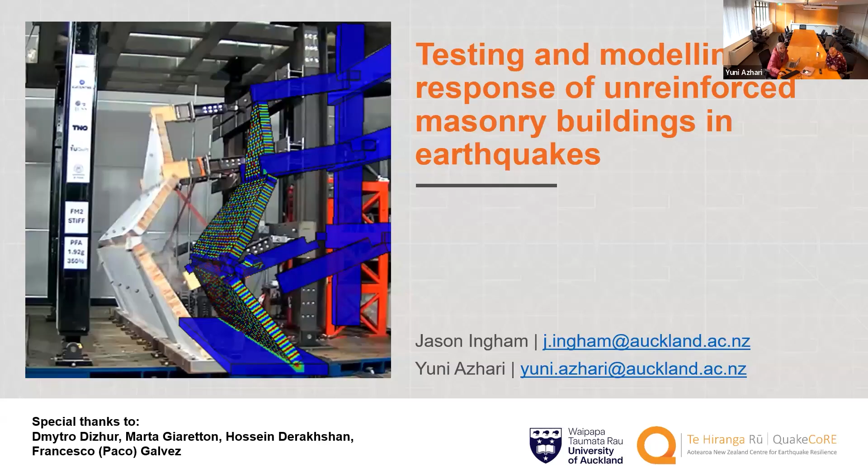I really just want to acknowledge that throughout this presentation, we're going to be referring to a lot of work done by Dmytro, Marta, Hossein, and Paco. I noted that Paco signed in today. There's a lot of excellent work that's come before by students from the past.

Where does this all slot into QuakeCoRE? In Generation 1, it was part of Flagship 3. Mostly the work we've been doing falls within DT2, whole of building seismic performance. I also wanted to note that in conjunction with Tim Sullivan from the University of Canterbury, I've recently begun co-leading IP2 on thriving residential communities.

Then it transpired that the Kaikoura earthquake came along and there was remarkably little damage to unreinforced masonry buildings. This was because unreinforced masonry buildings are very stiff. They get excited in a very short period range on the spectra, and the Kaikoura earthquake had a different signature to the shaking, so the old brick buildings didn't take as much damage.

Nevertheless, despite the fact it's all been a bit quiet in the world of unreinforced masonry, we have continued to be quite active behind the scenes.

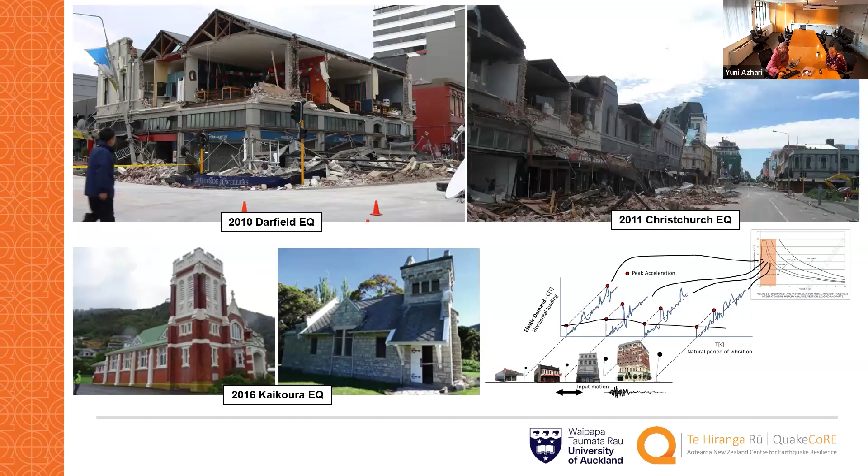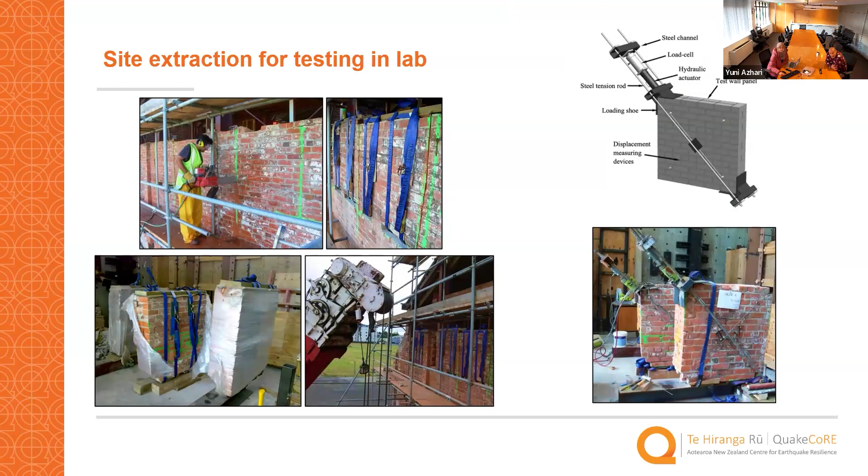What we have been doing is a variety of different work. Here, what you're seeing is that when opportunities present themselves, we're able to extract samples from real buildings and bring them back to the laboratory and test them. This was work undertaken by Dmytro in his PhD thesis.

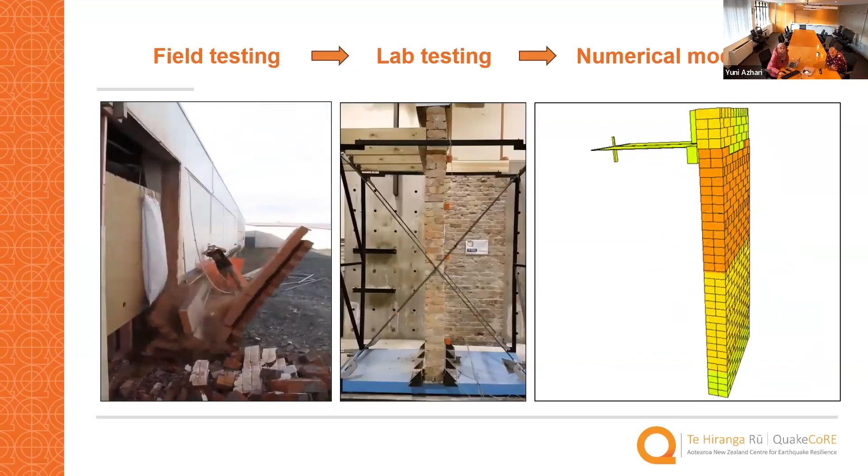We've also, where we can, done field testing, which is a primary opportunity for testing how real buildings perform. In the middle, you're seeing simulated response when we have constructed walls in the laboratory, again work that Dmytro led. On the right is the numerical simulation, a simulation by Paco.

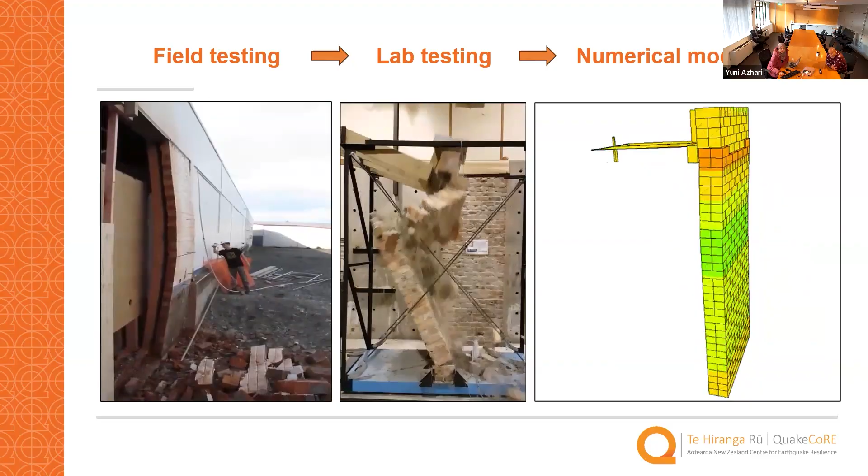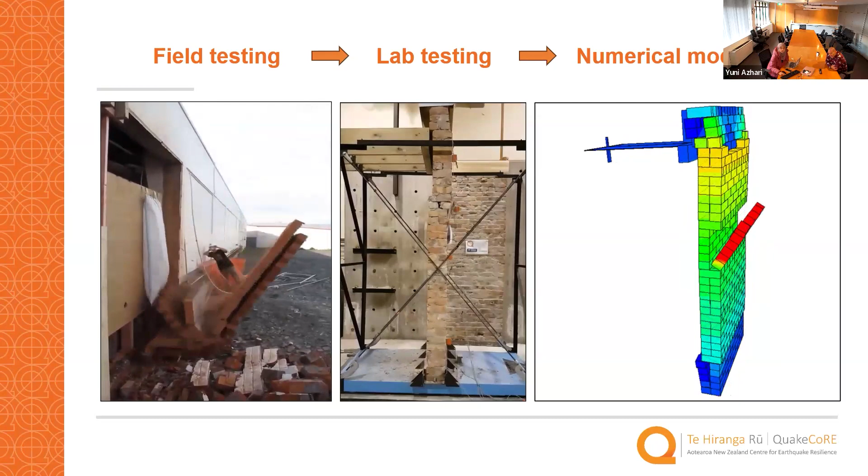This is the first time we want to emphasize that we've been using a numerical modeling technique called discrete element modeling. It's very numerically intensive; most of the time we're modeling each and every brick. I really like to use this strategy because you can completely confirm the mechanism that forms, and it's just the reality of the modeling strategy.

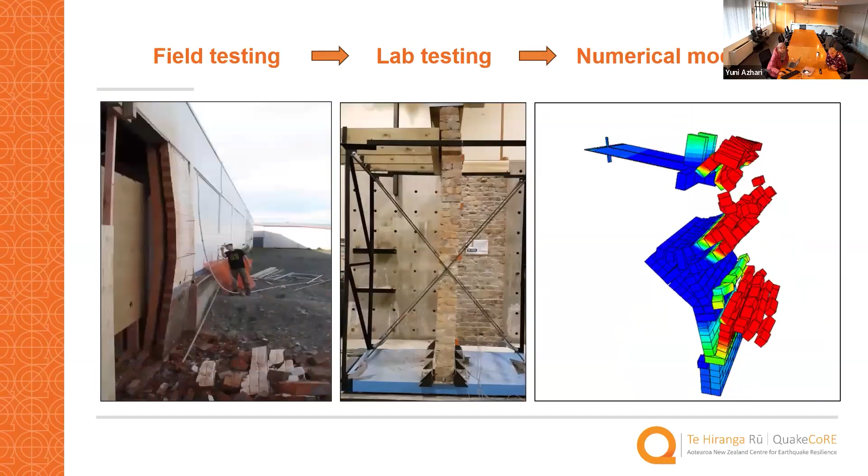What we've been doing is, where possible, taking advantage of testing undertaken in Europe at very large scale, and a number of these studies end up being blind prediction studies, where the experiments are done and they only provide you with a very small amount of information. From that, you have to attempt to match your prediction against the actual results.

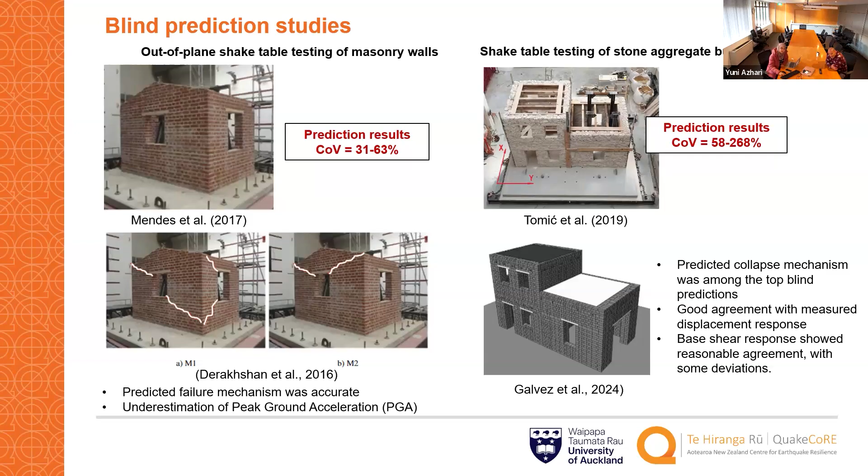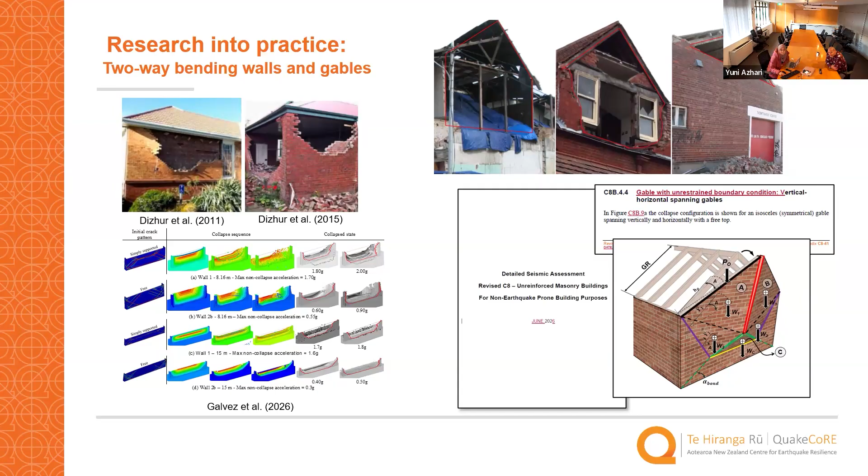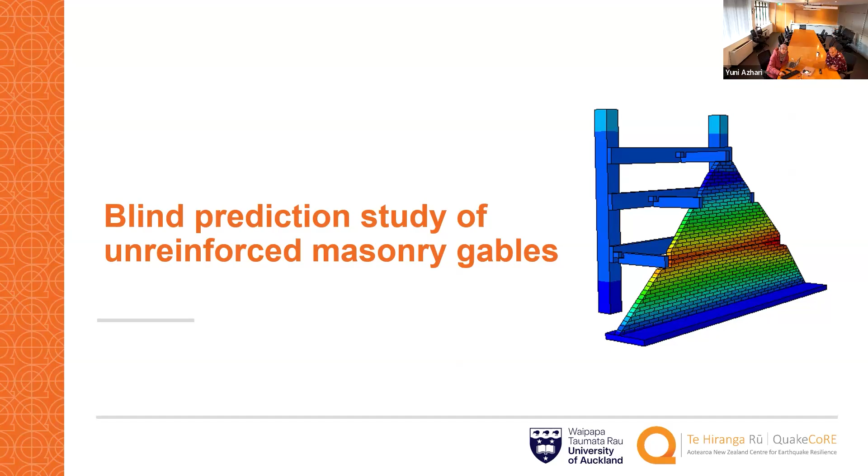Over to you, Yuni. Okay, thank you Jason. So as with the former students that came before me, and also encouraged by Jason and aligning with the intention to improve the seismic guidelines, I took on the challenge to also participate in the blind prediction study of the unreinforced masonry gables.

So the experimental campaign for the blind prediction was conducted in conjunction with the World Conference of Earthquake Engineering back in 2024. The setup of this gable is pretty unique, where there is what we call a partial restraint imposed by the purlins here.

On the left image, it describes the experimental setup where the unreinforced masonry gable is placed on top of a shake table, with the purlins connected to a back frame, and the back frame connected to the top and bottom table to induce compatible motions between each purlin. The input motion given was accelerations at the top and bottom table, and also on the ridge beam and each purlin's elevation.

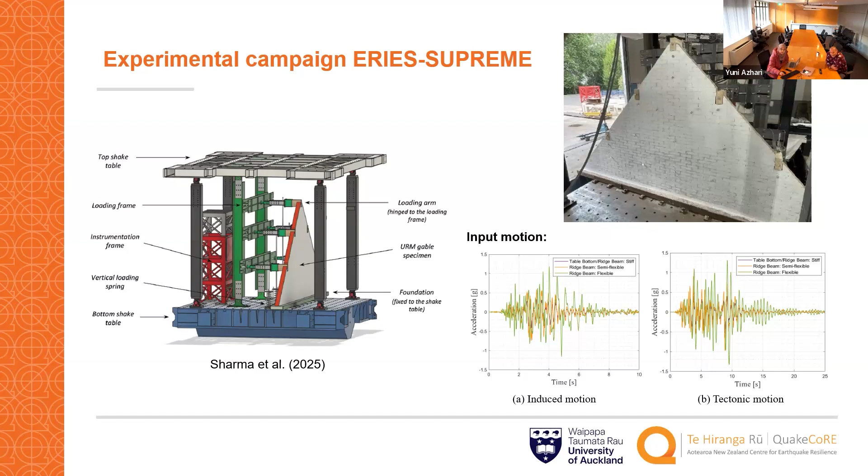And from this experimental setup, I translated them into a numerical modeling. The modeling approach that I opted for was the simplified micro modeling. As Jason explained before, it's a very exhaustive numerical modeling because it is both computationally hard and also time consuming.

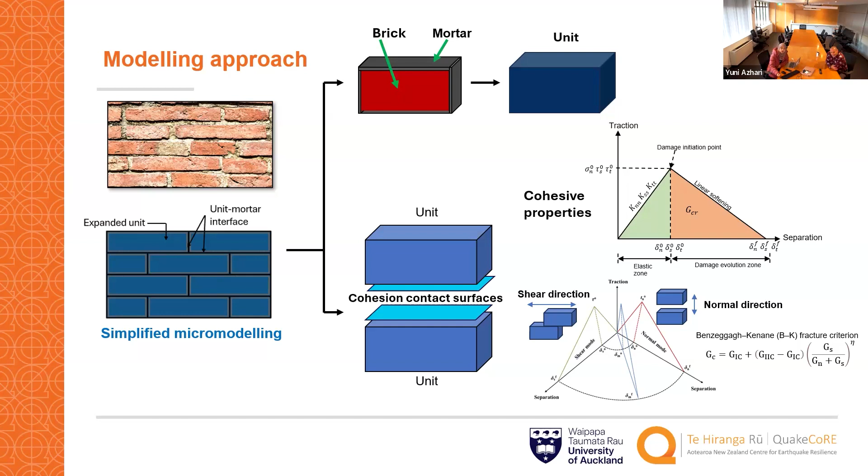So here I combine the brick and mortar into one unit, and between those units I applied a cohesive contact surface, which dictates the stickiness of the mortar between the bricks. That is dictated also by the cohesive properties in the form of a traction separation relationship, both in what we call the normal direction and also the shear direction.

With this modeling approach, I built the gable model for the blind predictions, where it's initially a pretty simple setup, with only the gable model, the purlins, and the bottom table. The way I impose the boundary conditions is by applying accelerations on the ridge beam at the top, at the purlins, and also at the bottom platform.

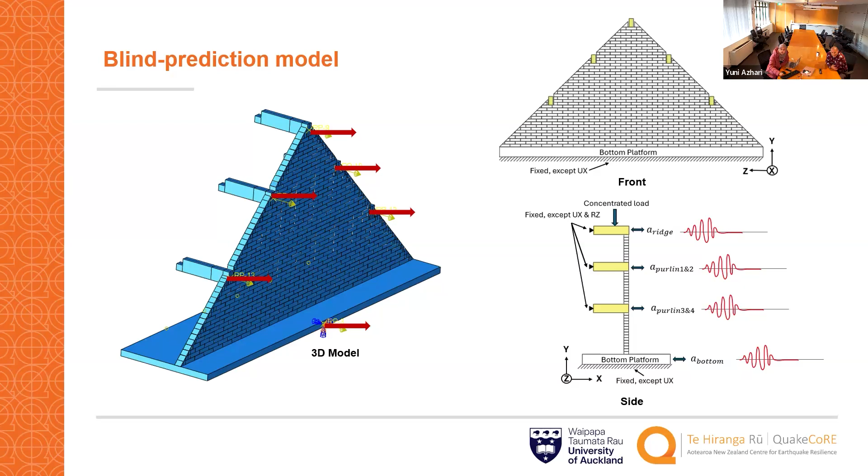And the result of my predictions was quite good in terms of the crack pattern. I predicted the crack pattern almost accurately, both for the case of the rigid roof scenario and also the flexible roof scenario.

But in terms of the peak base acceleration, as with the other submissions as well, I got an underestimation of the peak base accelerations. I also want to highlight the same thing in the case of my blind predictions: the coefficient of variation for both cases is pretty large, which means that all the teams across the world have a hard time predicting with limited data input.

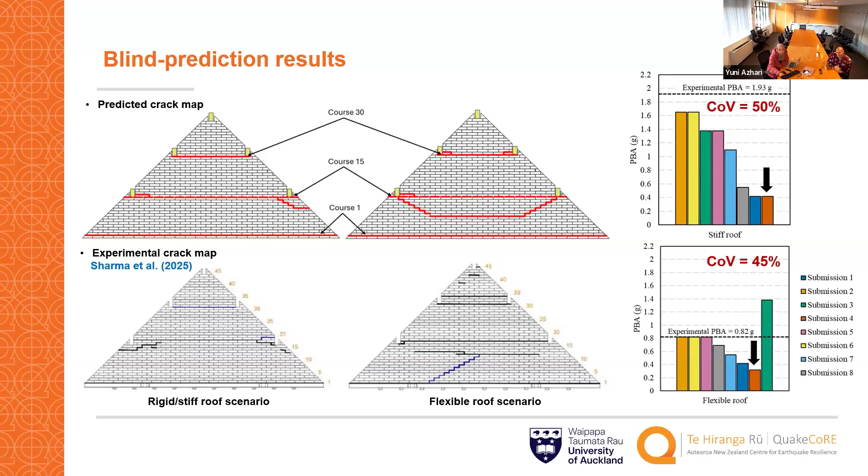After the experimental campaign concluded, they gave us more comprehensive data to refine my model in the post-diction stage, where I refined the boundary conditions, interactions, and the input of the earthquakes. On the left image, I switched from acceleration input to displacement input on the top and bottom. Because I applied a back frame behind the purlins to more accurately replicate the test setup, I'm able to guarantee compatibility between each purlin and the bottom table.

Based on the results from the sensors and tests, I was also able to refine the cohesive interface properties between the units or bricks, and the interaction between the purlins and brick units in the shape of a friction interface that had not been clearly defined in the previous prediction model.

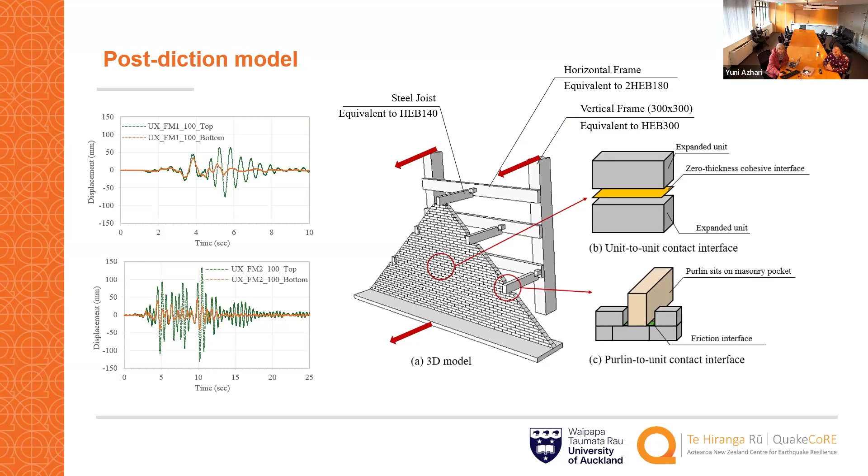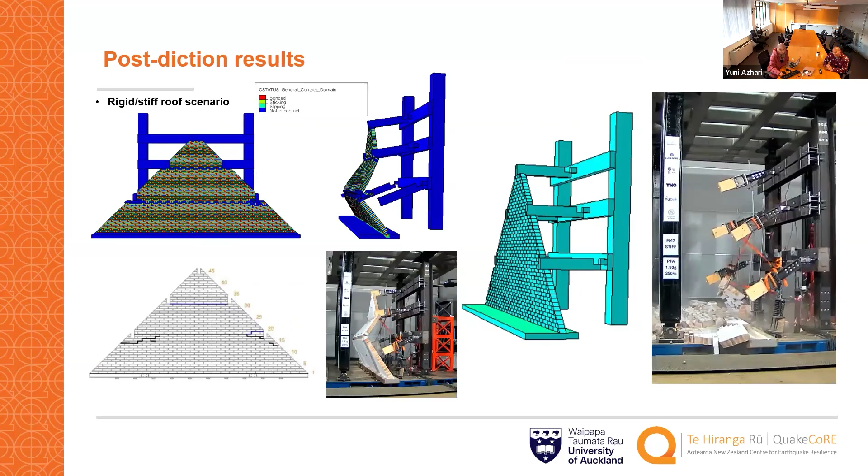From this refined model, I was able to obtain a satisfactory result, in this case for the stiff roof scenario. We can see from both videos on the right side that they comply in agreement really well. On the left is just a snapshot of the collapse mechanism of the gable in the stiff roof scenario.

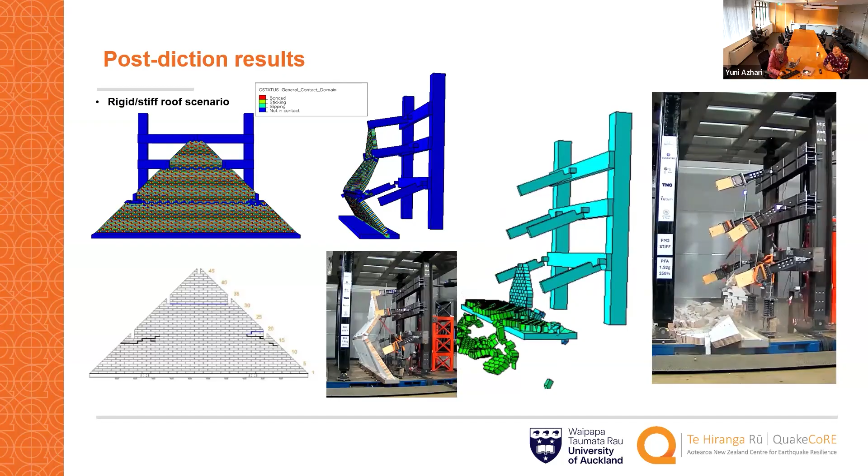For another case, which is a flexible roof, although the main crack pattern still occurs—the horizontal line between the purlins—there's a slight offset in terms of the diagonal cracks of the gable.

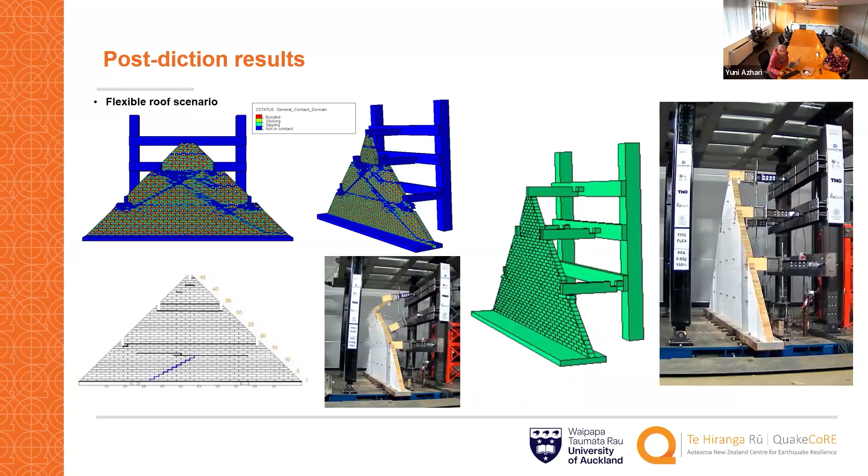For the gable responses, in both scenarios, peak base acceleration and top displacement were clearly matched satisfactorily between the numerical results in red and the experimental results in black.

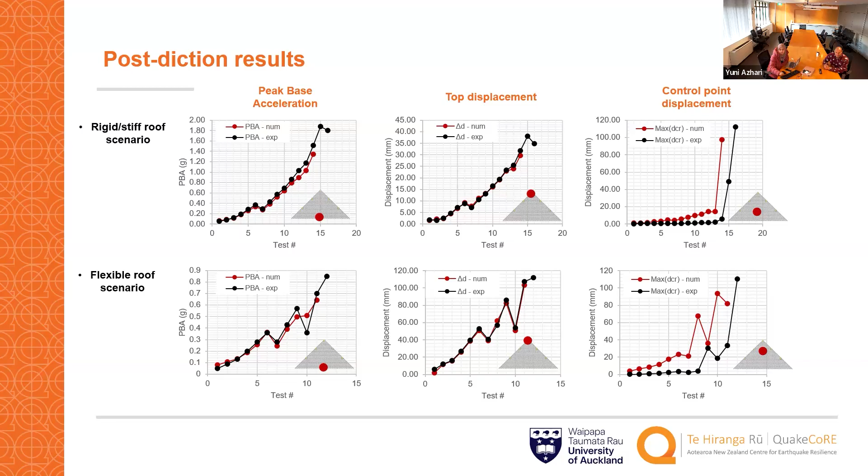So the lesson learned from those blind predictions basically highlights that we need to do experimental campaigns in conjunction with numerical modeling, because of the uncertainties involved in detailed micro modeling.

Here I'm tackling another topic not yet well addressed in the C8 seismic assessment guidelines: pounding between adjacent unreinforced masonry buildings. Pounding between buildings occurs when two buildings with different dynamic properties have an inadequate gap, and when an earthquake occurs, they start to pound against each other.

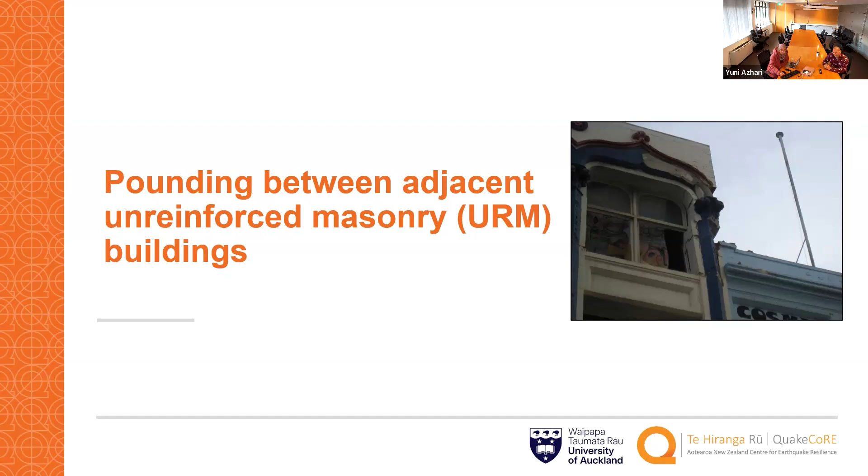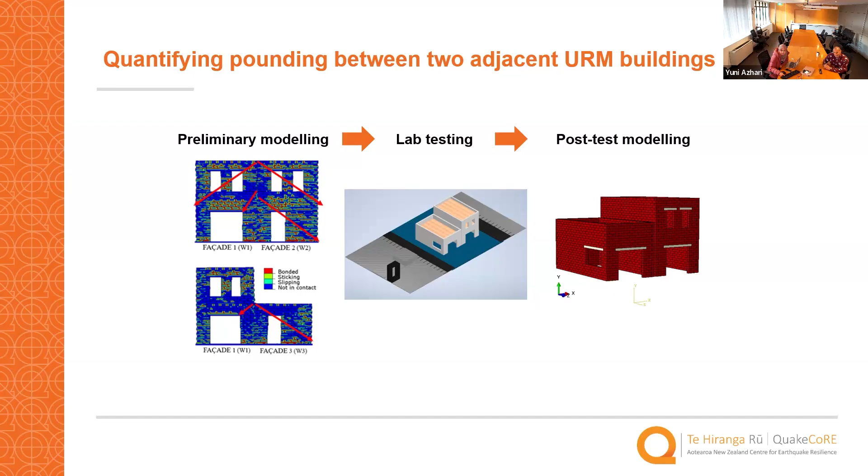Based on the same flow of testing and modeling calibration, here is the main step of the research I'm currently tackling. I do preliminary modeling, and from that we design the lab testing. The reason for preliminary modeling before lab testing is because of limited resources. So for the lab testing to be cost effective—biggest bang for buck—we do preliminary modeling first, then after testing we do calibration with the model to obtain a validated post-test model that can be extrapolated into several cases in the future.

As for the preliminary modeling, I started by modeling a quarter-scale building from an experiment performed before by Marta, who is also Jason's former student.

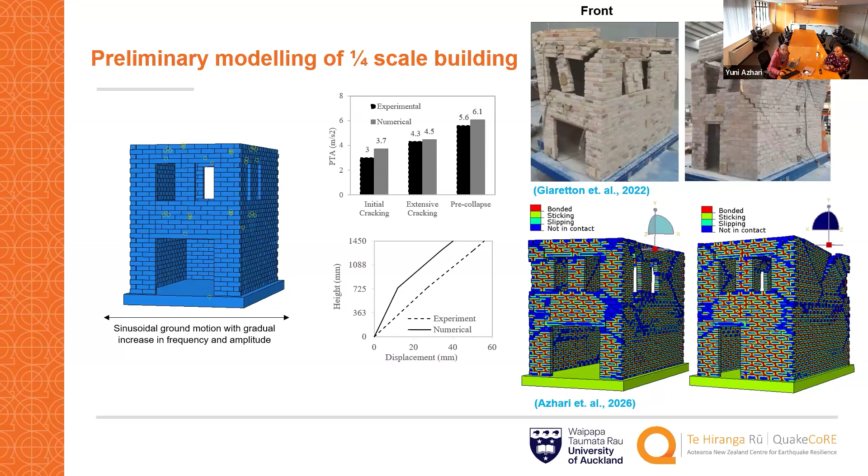From that preliminary modeling, I was able to extract the facade of the building and develop a parametric study of in-plane facades in pounding. I studied the variation in height or number of stories, variation in opening size, and variations in the gap between buildings.

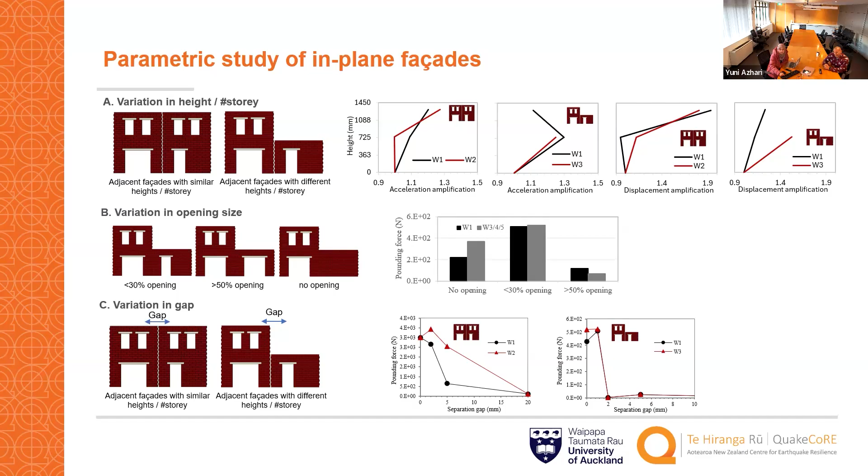I was able to design my building test specimen, which will also be in the 1/4 scale in order to fit the shake table that we currently have at the University of Auckland. And this 1/4 scale building will be built from a half-scale clay brick to represent a double leaf wall.

And the mortar that we're going to use will be considered a weak mortar, because we want the strong brick, weak mortar behavior, where the crack pattern will mostly be predetermined based on the mortar layer.

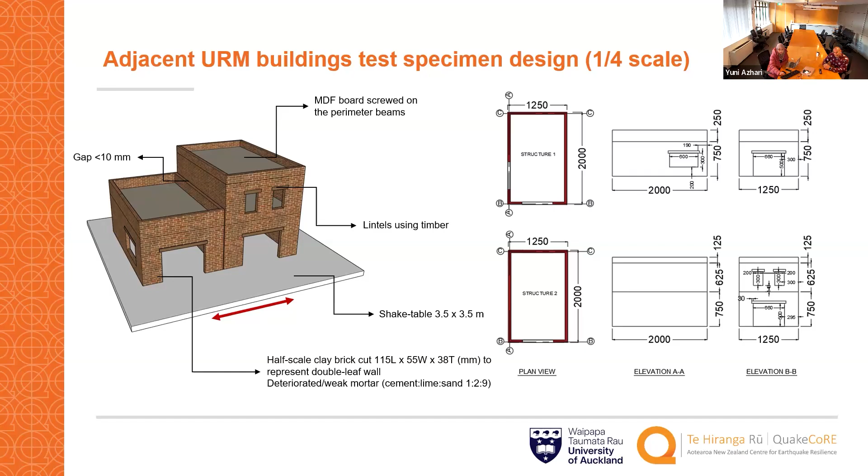And before doing the shake table testing, I'm currently doing the material characterization. This will cover a bunch of testing to obtain compressive strength, flexural tensile strength, flexural bond between masonry, and also the shear strength of masonry bed joint.

So all these parameters from physical properties of the brick and mortar will be translated into numerical properties of the model. From that numerical model we'll be able to predict the result of the testing, and then after the testing, I will be able to calibrate and refine my model.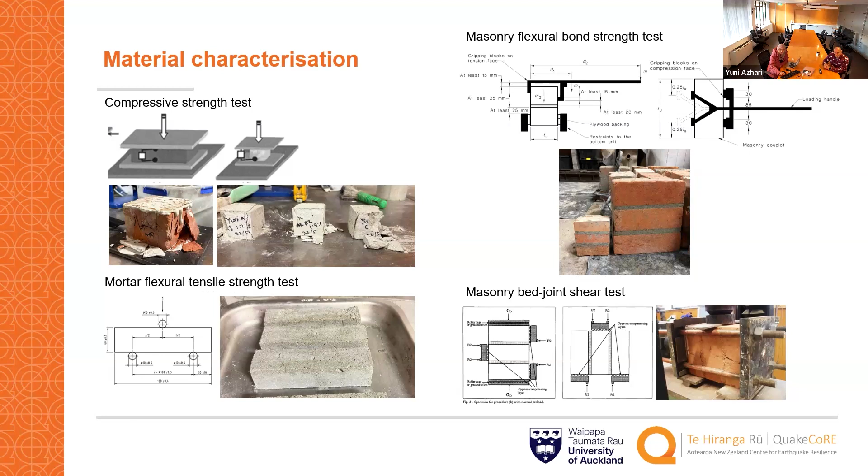So in summary, this is the flow of the project: preliminary modeling, then lab testing, then post-test modeling. From this refined post-test model, we will extrapolate into several cases in order to find a correlation and establish a procedure for quantifying pounding between two adjacent unreinforced masonry buildings that is more suitable for industry practice, and hopefully be adopted into future seismic assessment guidelines for unreinforced masonry buildings.

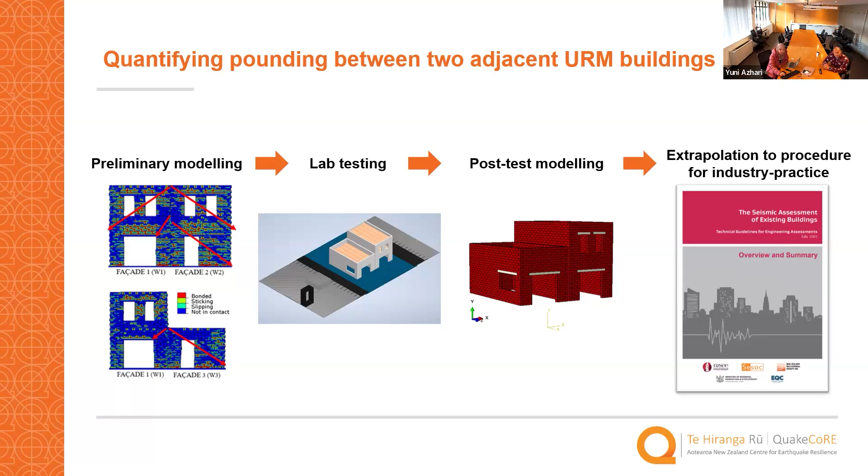So that's all about my project. I'll give it back to Jason.